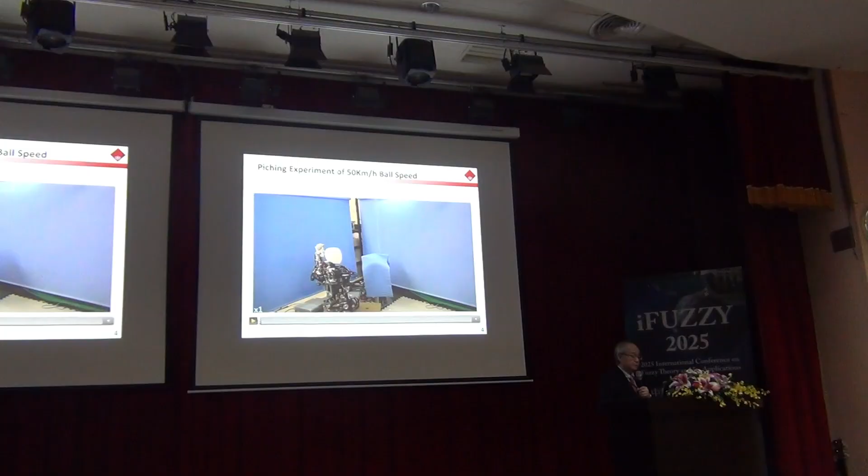And this is a recent result, like this. At this moment, this robot doesn't have a lower leg, but if the lower leg was made, the final speed is calculated at more than 100 kilometers per hour. So this is what this kind of mechanism can do—much faster than actuator speed.

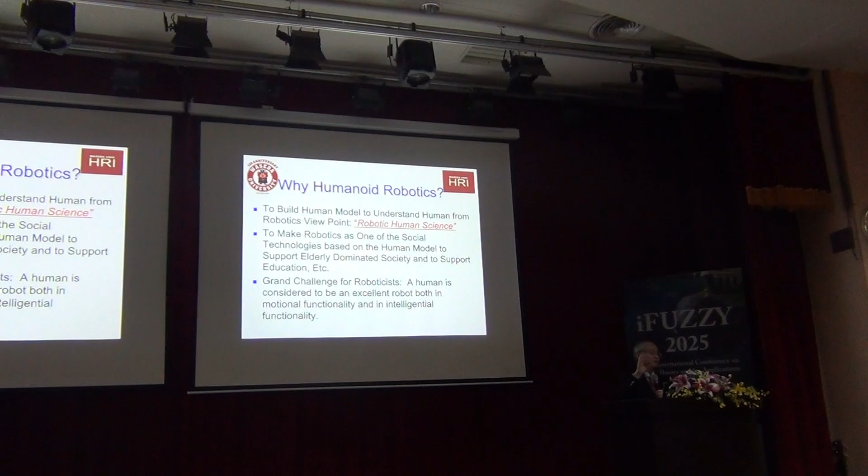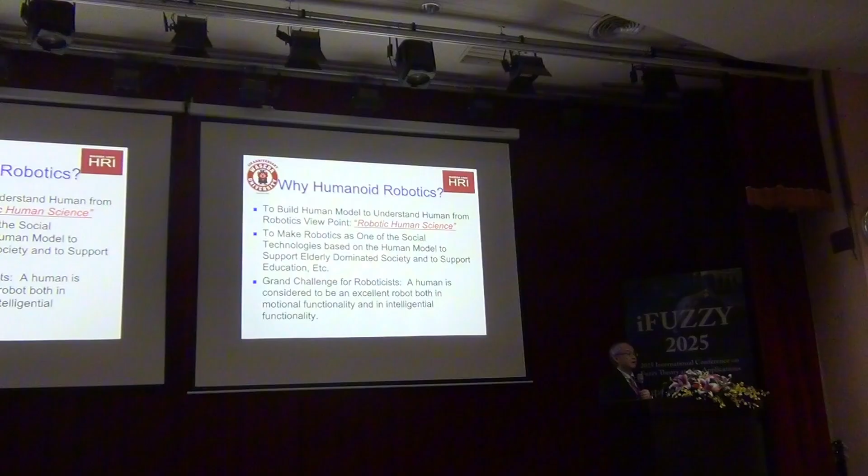So finally, making of a humanoid robot is a sort of grand challenge, something like the Apollo project in the United States in the 1960s. By the way, when I was a primary school student, I watched a human landing on the surface of the moon. That was a very big shock for me. After that, I really decided to become an engineer. So, making of a human is something like that.

After that, I'd like to show you some of my work, not recent, but after Kato's robot. This is a bipedal humanoid robot, as you can see now everywhere in the world. This is called WABIAN-2, which stands for Waseda Bipedal Humanoid.

Unlike the current or other types of humanoids, this robot has degrees of freedom on the pelvis, which makes the robot walk like a human. Many humanoid robots always bend the knee like this. Do you know why? This is to avoid a singular position at the knee joint. But actually humans move the pelvis in order to do that, which can avoid such kind of singularity.

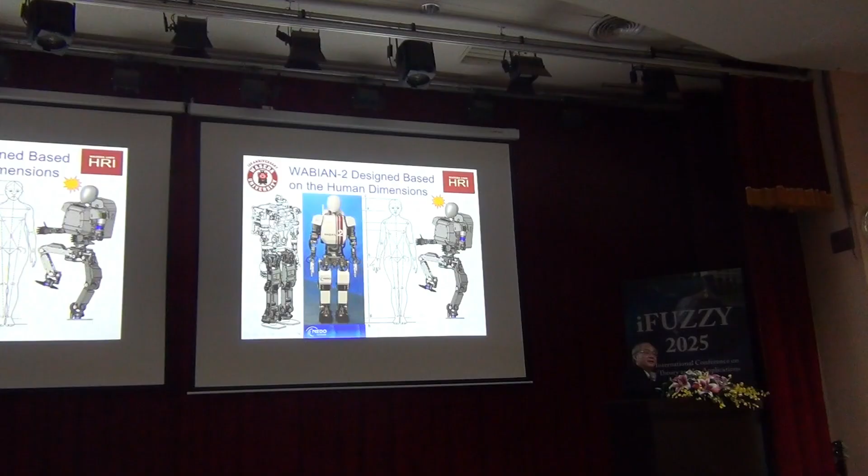Also, at that time, 2003 to 2006 or 2007, we designed the robot based on human anatomy. For example, the ratio of lengths - upper body, upper arm and forearm, shank and thigh - are almost the same as human anatomy, and the mass distribution is also about the same as humans. So even now, I believe this humanoid is the most human-like humanoid in the world.

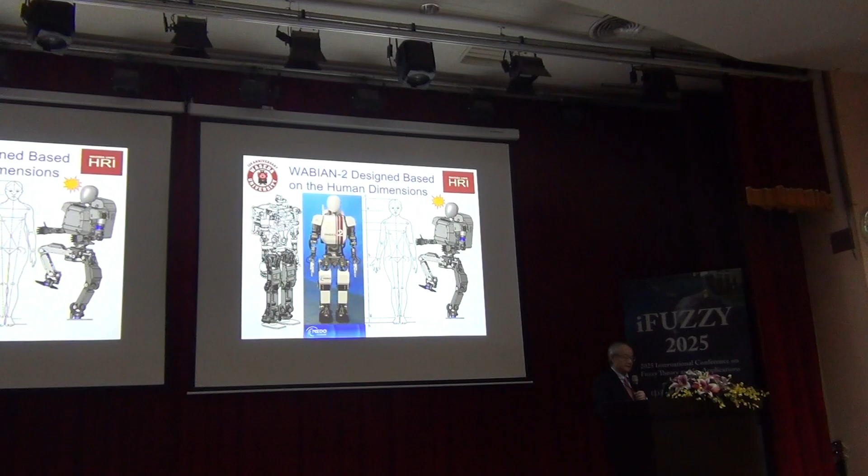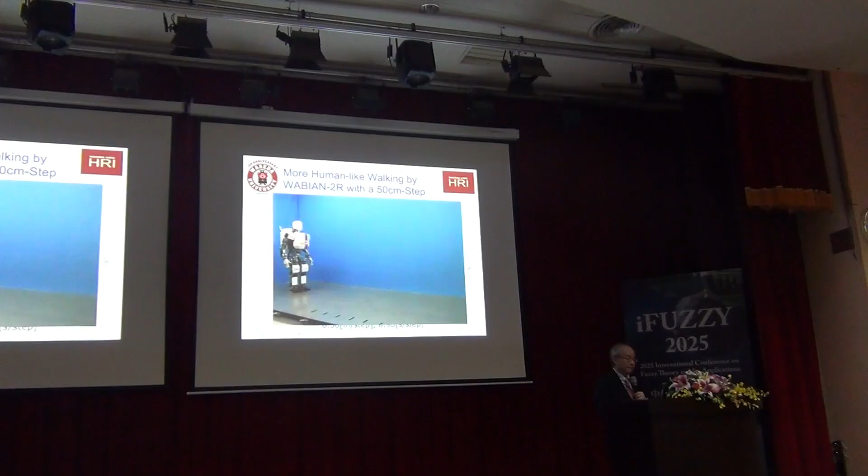Please see how the robot works. You see, the robot moves the pelvis and fully extends the knee while walking, like humans. And even if the outside surface is really smooth, the robot can still walk like this, because there is a sort of stability control.

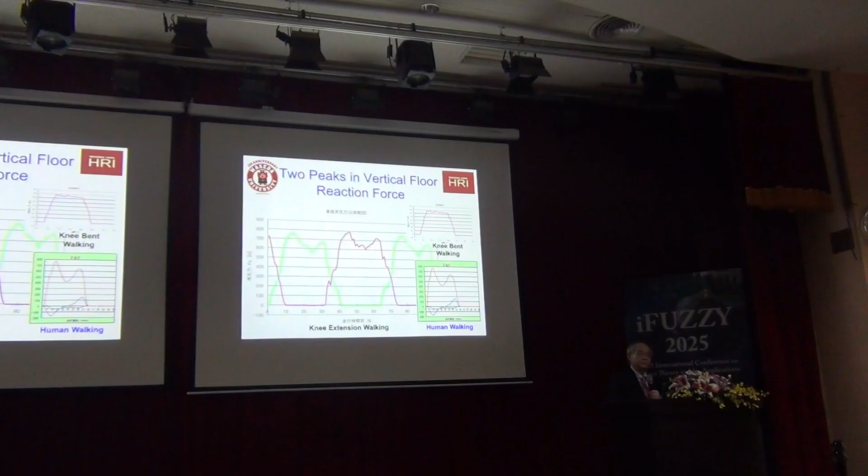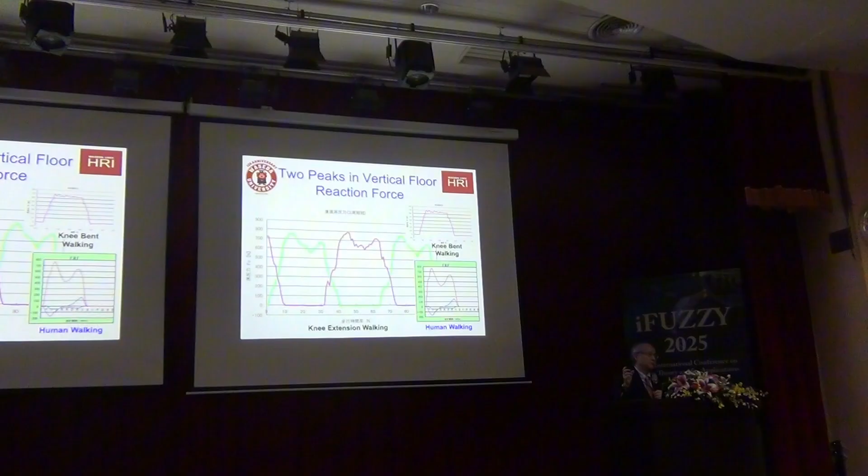Also, this is a big finding. We have been collaborating with researchers in human science and rehabilitation, and they told us about the ground reaction force while humans are walking. Especially the vertical component has two peaks only for humans, while chimpanzees or gorillas only have one peak. Why? This is evidence that the robot fully extends the knee while walking.

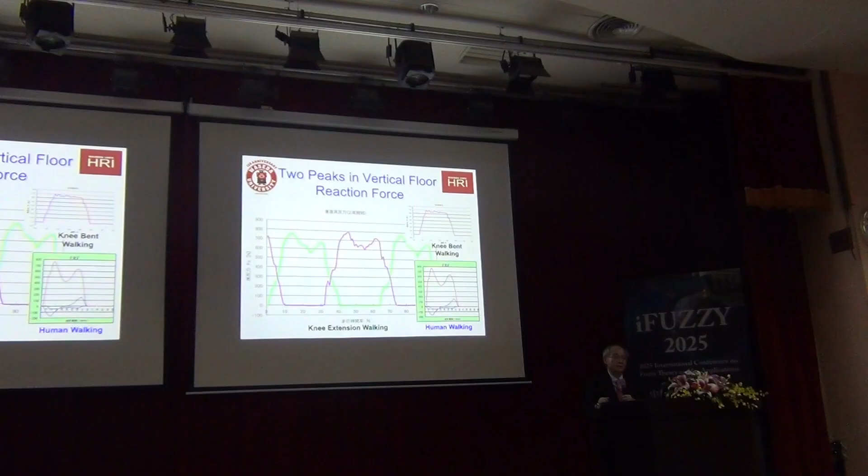On the right upper side, this is the ground reaction force of the Wabian that mimics humans, compared to Asimo - do you know the Asimo robot? Yes, that robot is always walking like this, so its reaction force has no peaks. But Wabian 2 has two peaks, like a human.

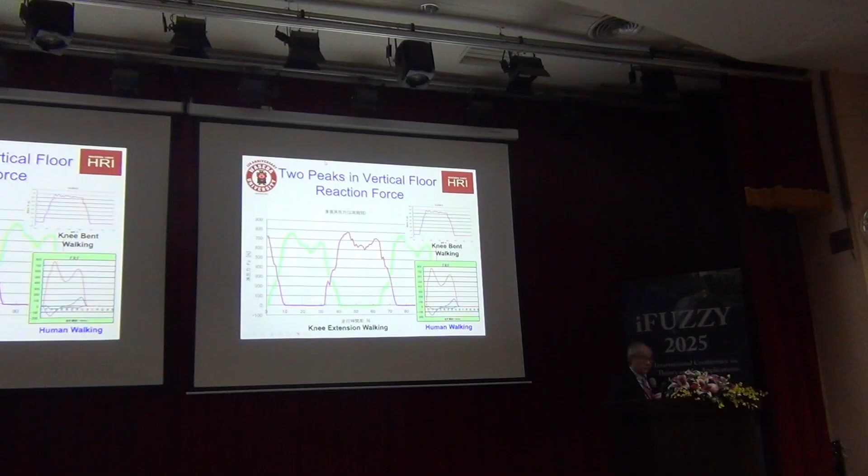This, I believe, is very important. After that, we tried to make the feet narrower to be similar to humans, because we wanted to collaborate with Adidas at that time. Adidas had a special contract with Waseda, but they refused. Why is that? Because the Japanese branch didn't have any right to do such a thing, only distribution to the Japanese market. That was very unfortunate.

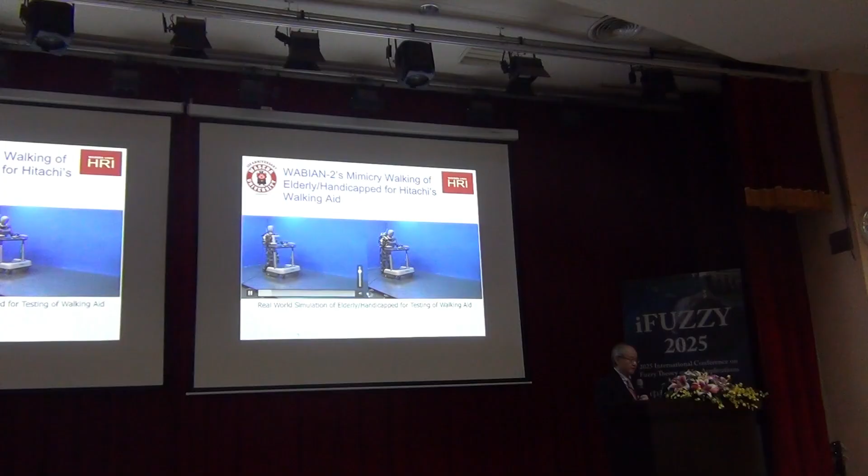By the way, we also collaborated with Hitachi. In the beginning of the 2000s, Hitachi was developing a sort of human assistive device for elderly or handicapped people. In the almost final stage of development, although they of course needed to eventually use real humans, they asked us to use our robot to mimic elderly or handicapped people, as a sort of human simulator.

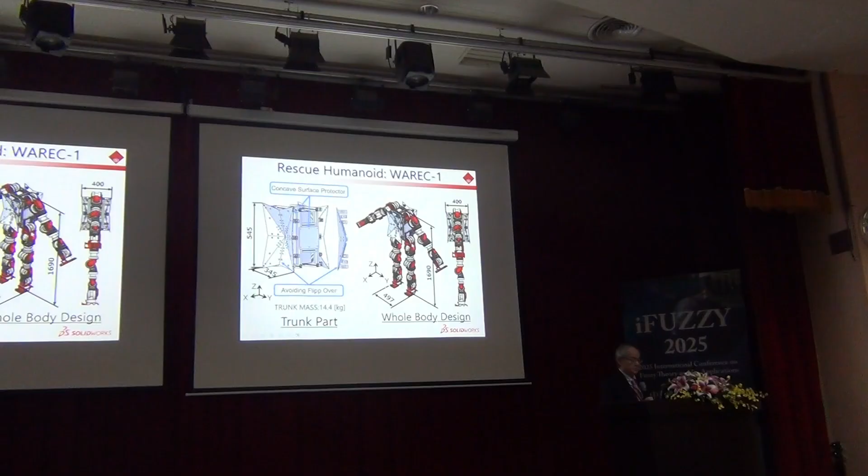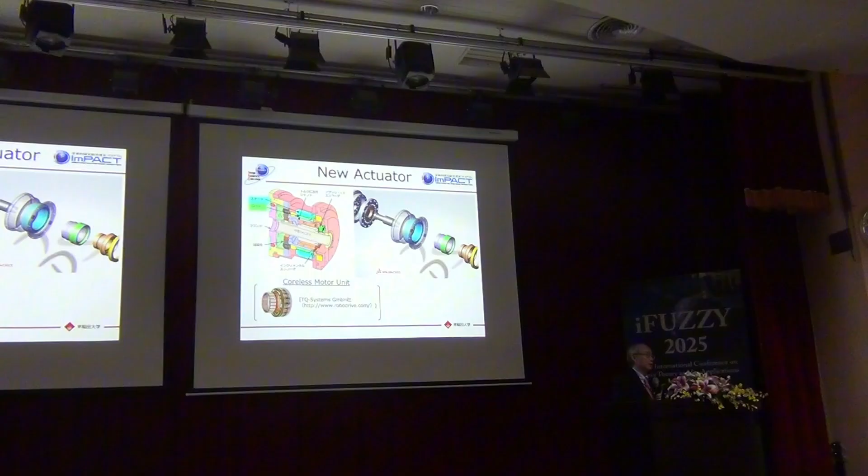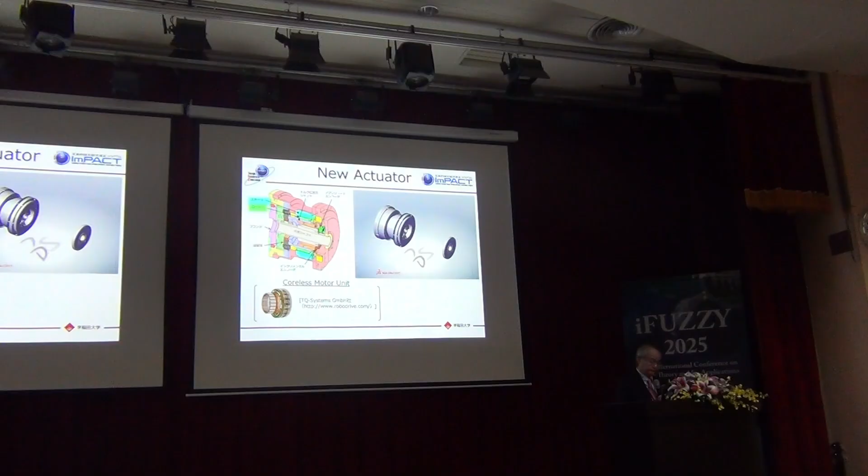This robot carries this kind of armor on its body—this is not for much reason. Another thing is the actuator; we couldn't find one in the market, so we finally decided to design and produce it ourselves at our university. But Mitsubishi Heavy strongly helped us realize this actuator development.

Okay, last July, we press released the new organization called KYOHA, which stands for Kyoto Humanoid Association. Kyoto has a lot of high-tech companies—maybe Nintendo, yeah, not only Nintendo, there are many companies. Tmsuk is also located there now; before it was in Fukuoka, they moved to Kyoto. And Murata and Kayaba, there are others too, of course not limited to Kyoto but also many other areas of Japan now.

Still, many companies are asking to join, so maybe next time, maybe the beginning of next year, we are going to press release again. Mabuchi Motor—many people believe Mabuchi Motor is a motor company for toys, but that's totally not true. Most cars use Mabuchi motors for power windows, opening doors, wipers, voice recorders, copiers, printers—most of them are made by Mabuchi. Mabuchi is now going into the humanoid market for actuator development.

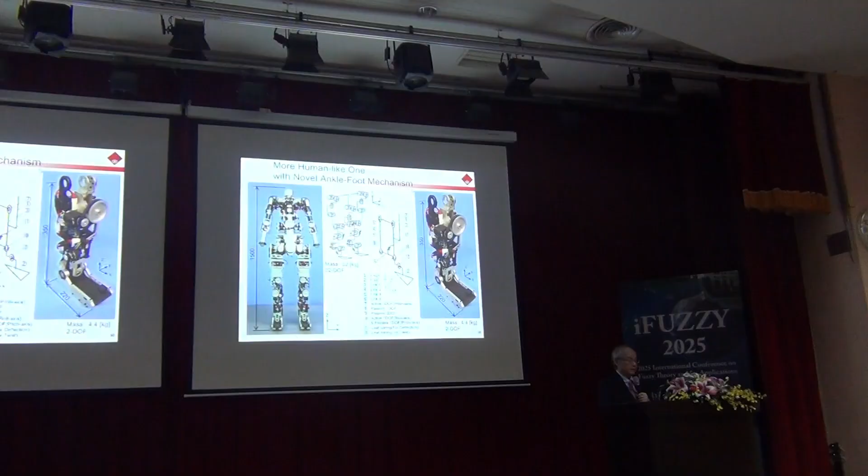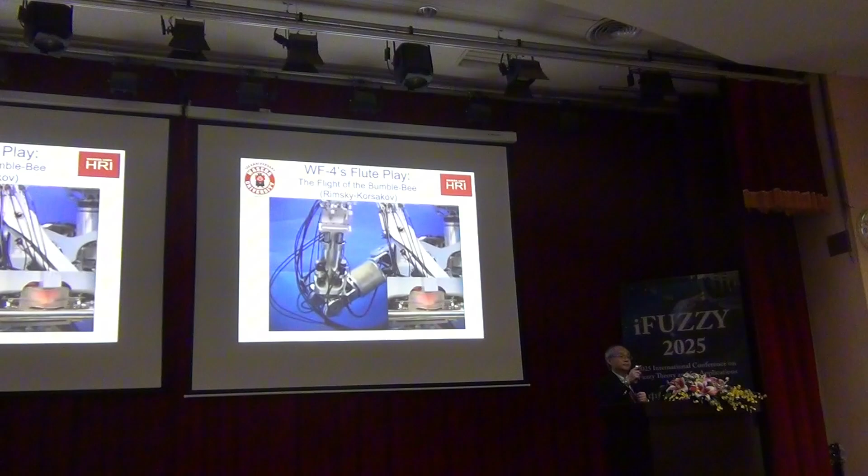So this robot, you give the musical score, MIDI data. MIDI data is a sort of digital score. By using that data, the robot automatically generates the optimal breathing point while playing.

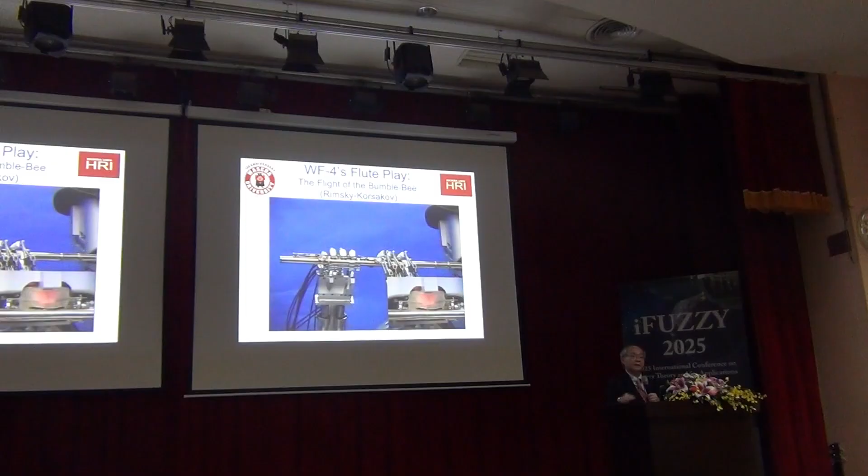And the most important thing is the mechanism of the lips. You can see, each time, the robot precisely changes the shape of the lips.

By the way, a professional flautist told me that this play cannot be done by a human—the speed is too high, the change of the note.

Then one day Toyota came to my house and said let's do a collaboration on the musical robot—not a flute player, but a saxophone player. So we collaborated with each other.

They also requested, strongly requested, if possible, would we put that upper mechanism on the lower mechanism made by Toyota, meaning there would be no space for the lung mechanism like the flute playing robot. So we finally decided to develop a very small compressor for the saxophone player.

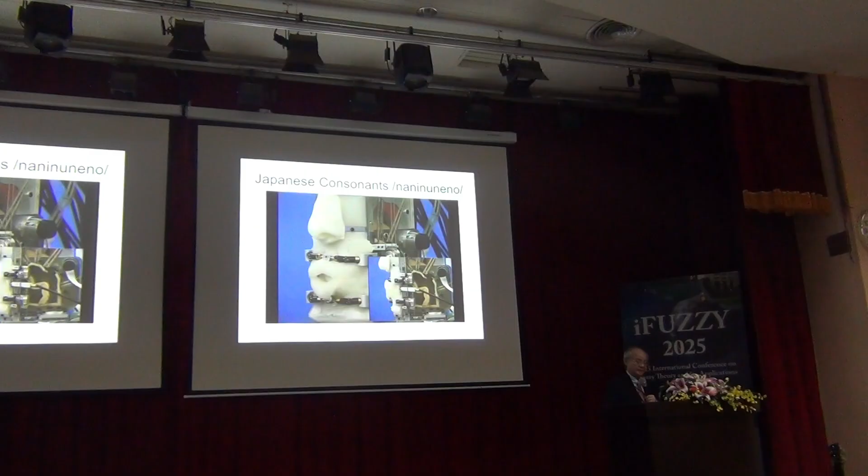Japanese consonants—in this case, the robot needs to have teeth. Na-ni-nu-ne-no, nasal cavity is important. Pa-pi-pu-pe-po, air tightness is also important.

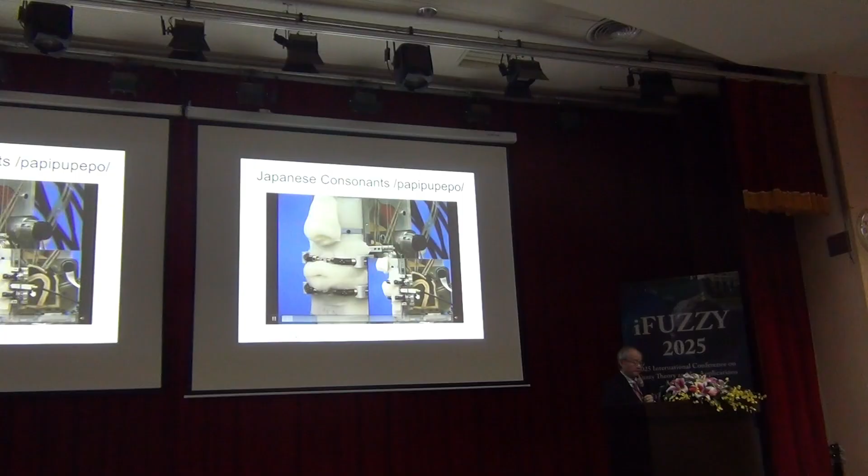And this is continuous i-u-a-o. It's very difficult to listen to because the spectrum goes to the lower frequency.

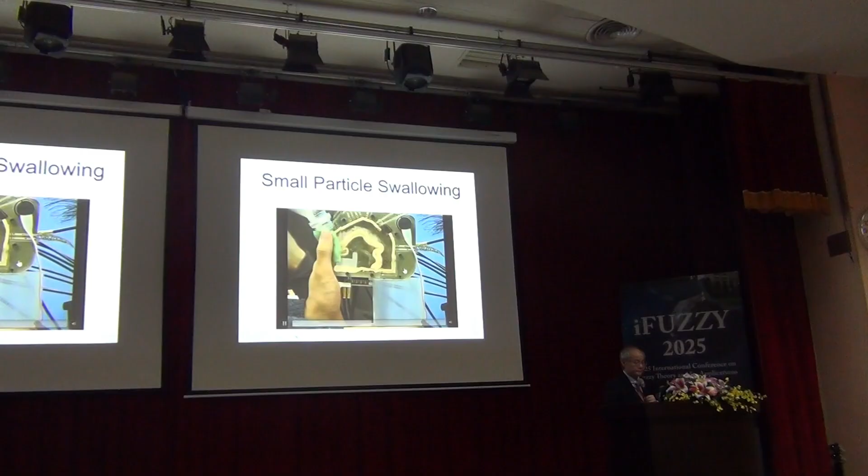And some researchers in dentistry told me, why don't you try drinking something? So we tried that. This is swallowing. This is drinking. This is oolong tea, Chinese tea.

We also collaborated with my university, a huge university with more than 60,000 students, accepting the largest number of Asian students in Japan. We collaborated with psychologists in the different school of literature. They helped us a lot. So this robot has many sensors and actuators on the head part.

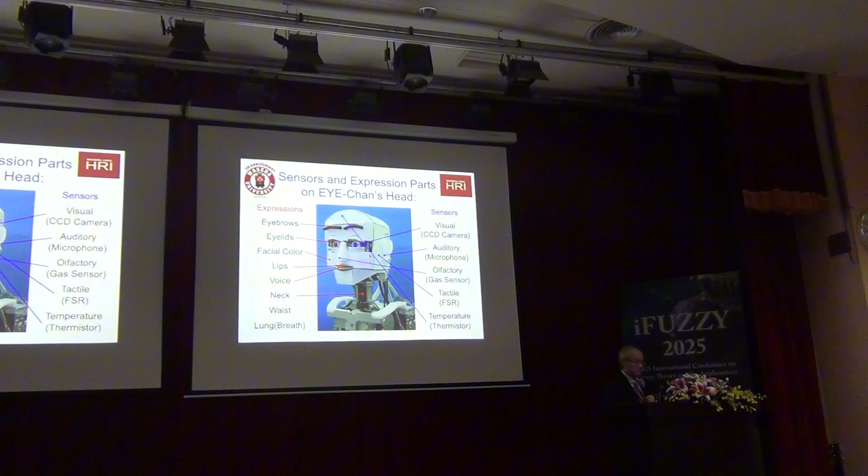I don't have enough time to explain in detail, but you can see so many sensors and actuators like this. So the important thing is this: how do we control the emotion? In mechanical engineering, equations of motion—this is the basic equation to define.

This is a starting point of education in the university—not only in Taiwan, Japan, but all over the world in mechanical engineering. So I had an idea: maybe the equation of motion can be used for emotion change. So we call it equations of emotion. Then we change the coefficients like this and the variables like this.

This is a simple explanation of how this works. So we employ a 3D space for human mental space: arousal-sleep, pleasant-unpleasant, certain-uncertain. They taught us a lot about how to modelize it. Of course, they are not so familiar with mathematics or physics, but there are a lot of papers which gave us new ideas.

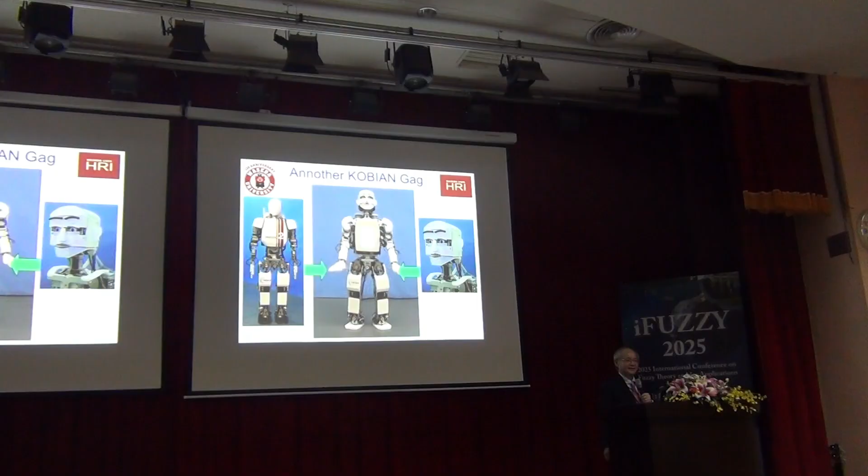And because this robot can move its legs very high, this is what I call theater robotics.

One day a theater director came to me and asked, please teach us how to make a robotic mechanism for a theater play, because they have a special privilege to perform works of Osamu Tezuka, who is thought of in Japan as the god of Japanese manga.

One of his famous masterpieces is Blackjack, related to medicine. Blackjack cannot be easily played because there are a lot of strange shapes, some kind of biological cyborg, or something like that.

So we accepted one team member of the theater group, and my student also helped them develop some kind of robotized mechanism for the theater play. This is Mr. Kudo, the producer of the theater group, Human Arts Theater.

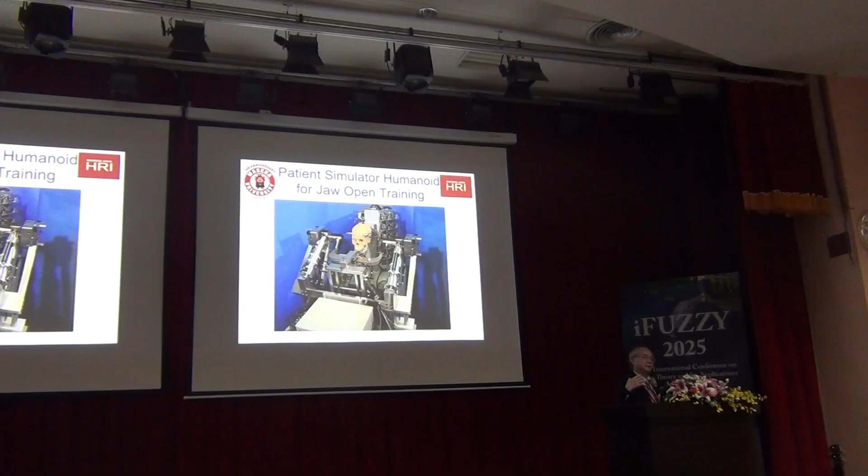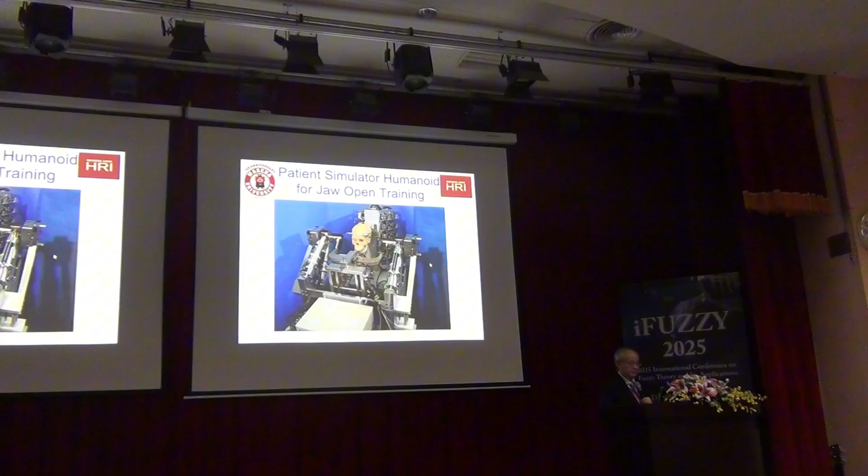But anyway, we succeeded a lot in medical treatment for the jaw joint problem. One day we had the idea that even though we do our best with robot control, we're not sure if it's safe for the patient, even though doctors say it's good. So we had the idea to use the chewing robot as a human patient simulator before applying it to real humans. We had a patent for that, and I still have the patent.

So this humanoid robot, in this case for dentistry, can be used for many purposes: testing of current devices, invention of new devices, new treatments, and education. There is a computer recording all the data in between, then the robot mimics the skilled doctor's treatment.

We had a collaboration with Kyoto Kagaku. They are the number one biggest company producing medical teaching parts for education, including I think in Taiwan too - brain, heart, many internal organs, many parts of the body. It mimics those parts because it's almost impossible to see everything while in the medical department.

They wanted to have a mechatronics department in the company, so they sent us several young engineers. We taught them how to design those mechanisms for mechatronization of their devices.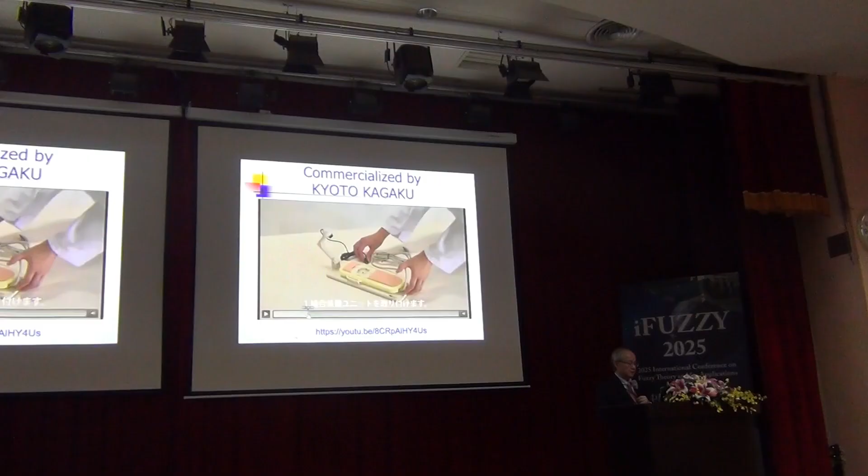You can check by accessing their website. This is a teaching video of the device. And after that, we had a new project.

A sort of upper body human for airway management. There are a lot of cases in traffic accidents and surgery where the patient needs to have an airway between the lung and the outside. But a lot of accidents occur because of unskilled people.

So we put a lot of sensors that mimic the airways, like a human. And also a lot of medical doctors - do I have time, or do I need to finish? Three minutes? Okay, thank you.

They helped us a lot on how to improve it. When they had time for 10 or 20 minutes, they came to my lab just beside the hospital, the twin building. So we finally built up the prototype, and then we gave it to the doctors, and they finally finished the commercialized one. You can see it also there.

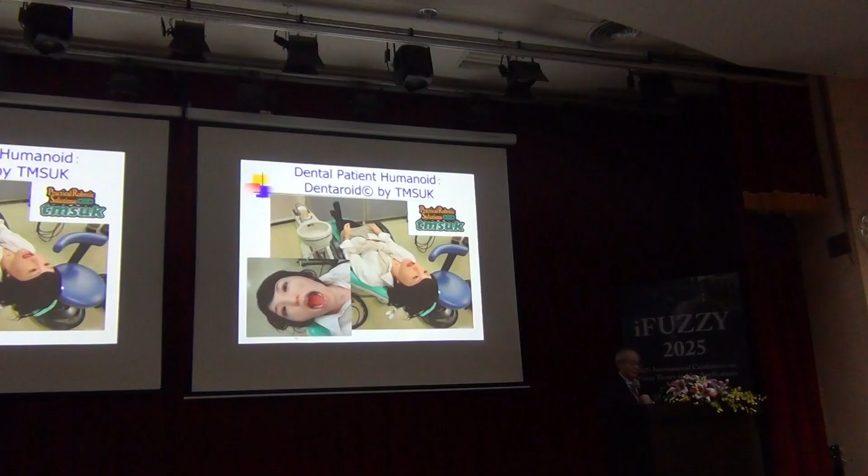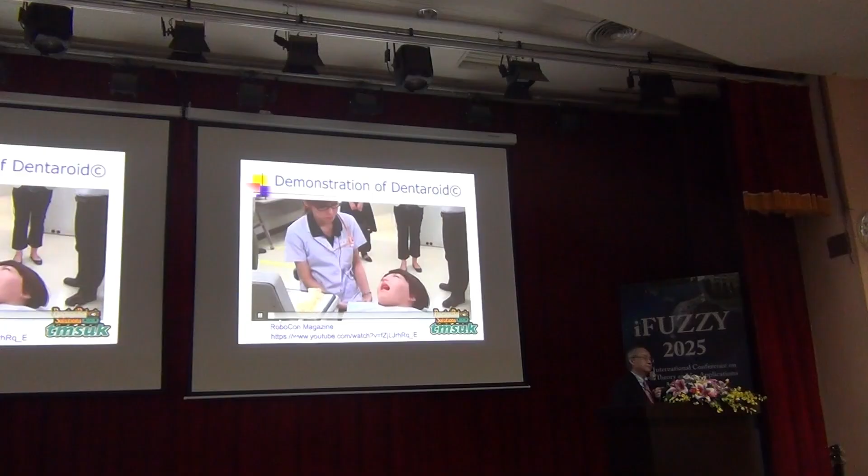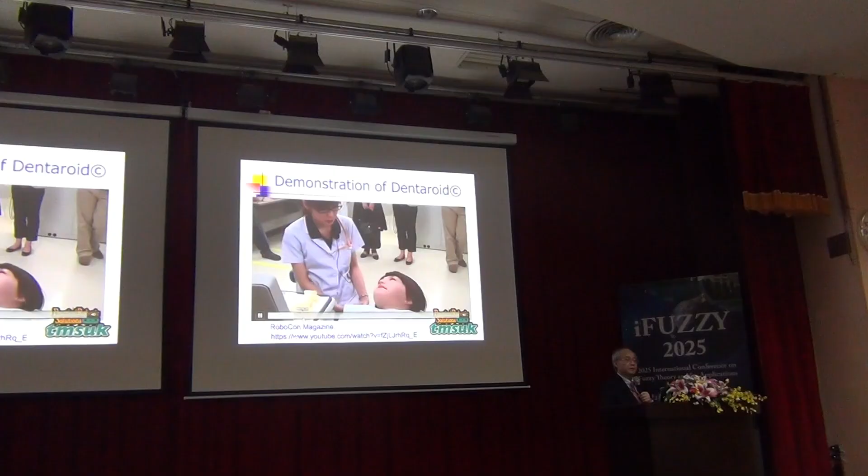This is also another collaboration - TMSUK. This is a dental patient humanoid. We collaborated with Showa University and Kogakuin University, where one of my alumni, Professor Takanobu, is now a professor. We collaborated with each other to develop this kind of patient robot with TMSUK.

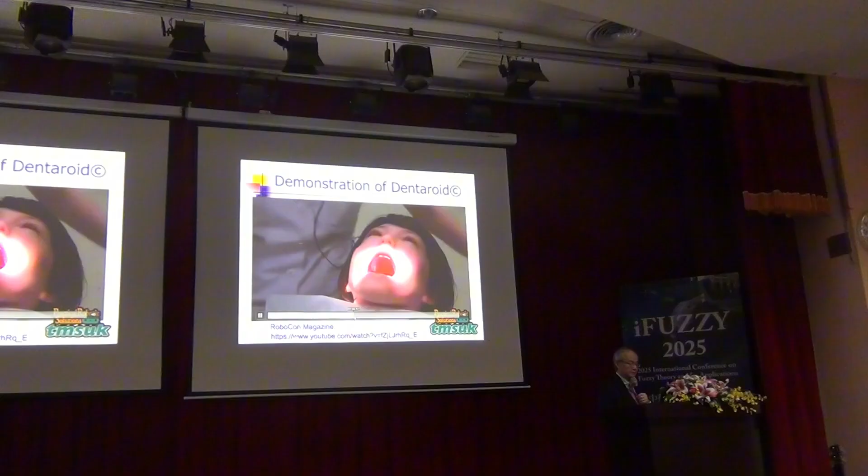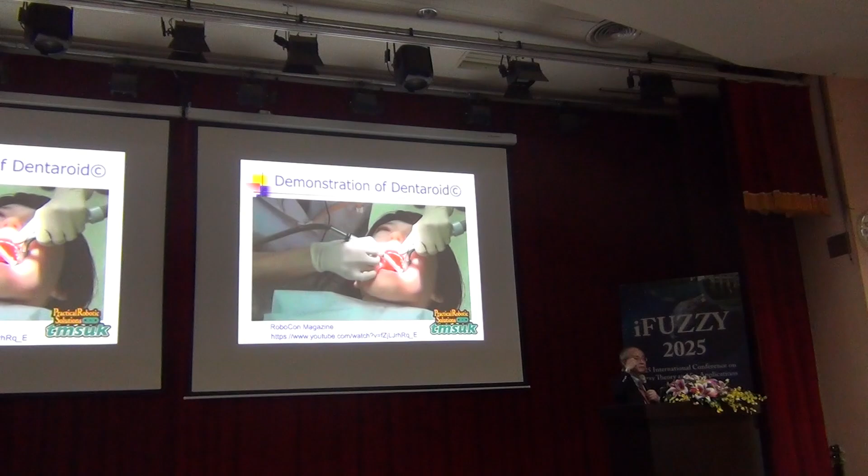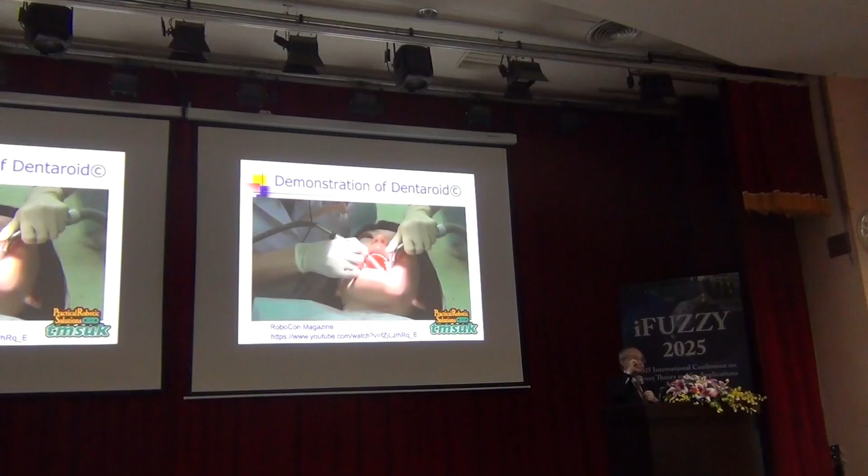So you can use real dental treatment tools like this, and there are several sensors inside. The robot is also totally self-controlled, because this demonstration is being done based on OSCE - maybe some medical department people here know this. OSCE is now worldwide, the standardization for medical treatment.

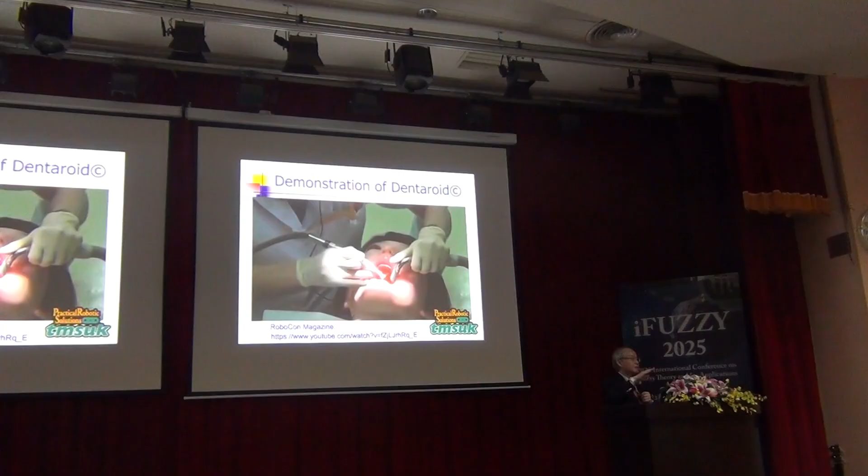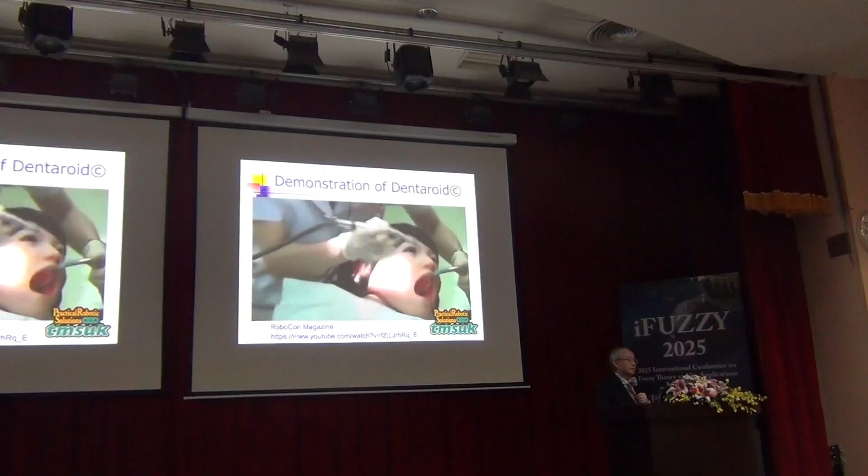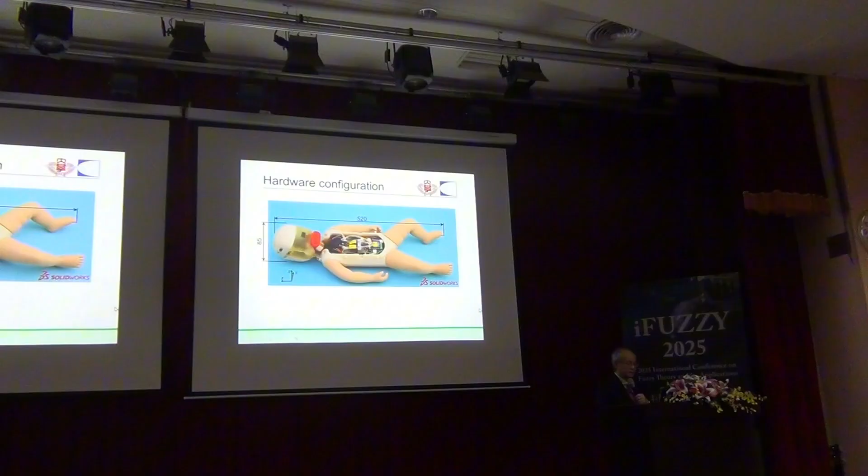So the doctors told us that highly advanced AI is not so important because it's already standardized. We also developed a newborn baby type like this. Okay, this is the end of my talk. Thank you very much for your patience.